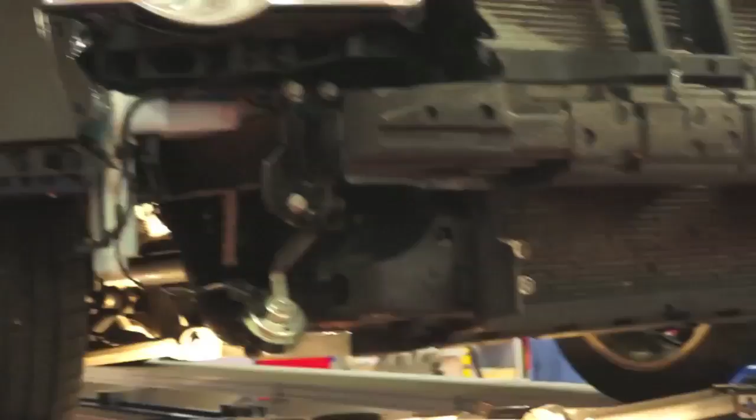Sean Hart with Car-O-Liner Company, Director of Technical Services. We're here at AASP, the Northeast Show, and we're going to be here this morning with Larry Montanez talking about triage and estimating damage on collision vehicles.

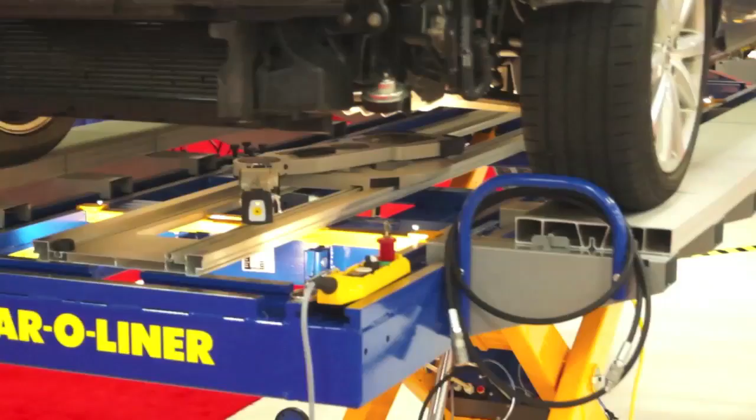Triage is a French word, a noun. It basically comes down to sorting out or separating the type of damages that are there. You also want to assign the order of urgency, the degree of urgency of how bad the car has to be repaired.

Some of you might hear catchphrases now like fast track or structural repair. If it's a fast track car, I know I can get it out in 2 days - I'm just changing a bumper cover, a headlight, maybe a fender, and painting it. I have an idea beforehand, and decide how you're going to treat the vehicle.

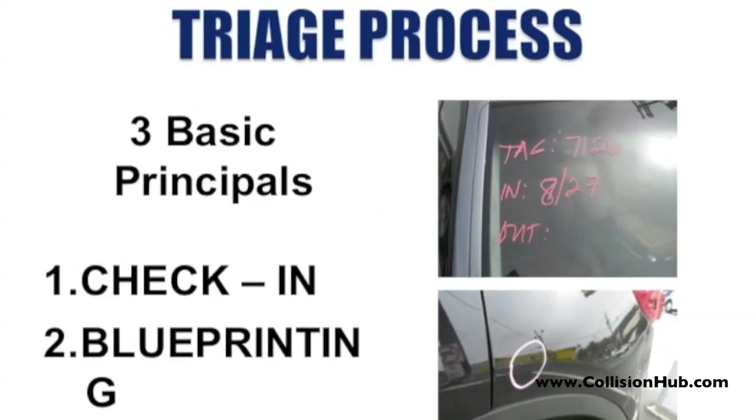The triage process breaks out into 3 basic categories. One is your check-in process when the vehicle first comes in. Your next is the blueprinting you're going to do with the vehicle. And then, of course, mapping of the vehicle.

Your check-in process - a lot of you guys do this in your shop already - you get the information from the consumer, you get their description of the accident, you tag the keys, you wash the vehicle for repairs, you get it ready to put into service. You also walk around the car with the customer, try and upsell, and then you put either windshield notes or a sticker.

You really shouldn't write on windshields anymore. They find that a lot of the chips that happen to the windshields, that colored pen gets stuck in there. And on side glass, sometimes it doesn't like to come off, and it washes off if you wash the car. Best thing is to get the sticker - most of your paint companies have some sort of sticker you guys can use for that.

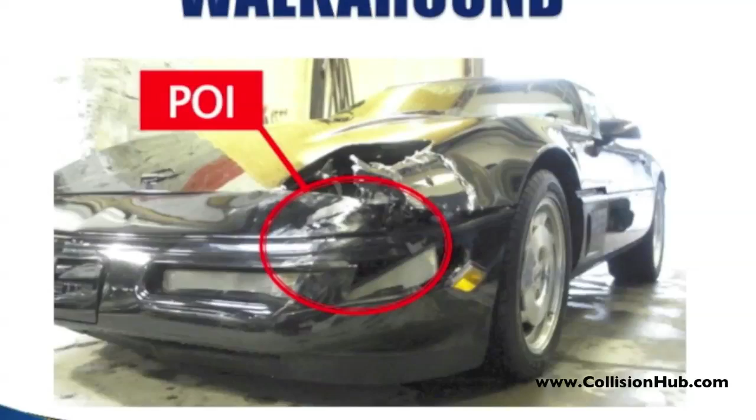So the walk around - this is a Corvette that was hit where? Left front, like a left front hit here. My damage analysis of this vehicle is going to start at the right rear. Why is that? Well, I want to find out where all that energy got deflected to and start in the least area of possible damage, then work my way back into the area of damage. I know it's badly damaged in the left front area, so where is most of my estimate going to be? The left front.

We all get busy throughout the day, we're going to miss things. So if I start in the opposite area and work my way back, I'm less likely to miss the small things.

Another thing you want to check is panel gaps as you walk around the vehicle. In this case, it's a 2-door vehicle, so you want to be able to catch and see how the doors open and close, how the windows close to the roof structure. Another thing I did here is put my fingers between the wheel and the rocker panel to see how much room is in there.

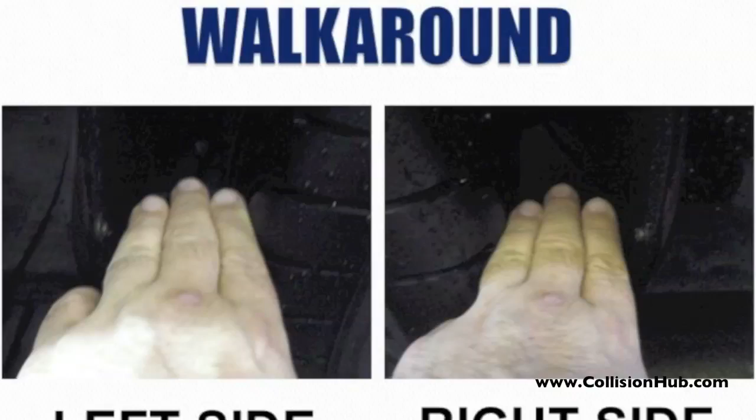Now this is a quick check - you're not fixing the car, you're not doing measurements. But if I found that only 3 fingers fit on one side and 2 fingers fit on the other, what would you think? I got something wrong here - do I need to do something else? Yeah, I'm verifying that the car has more damage visually and by tape measures than if it didn't. So I'm kind of trying to qualify or quantify why I'm going to put it on a 2-post lift and measure the car electronically. And then obviously my front area, I'm going to take care of my damages.

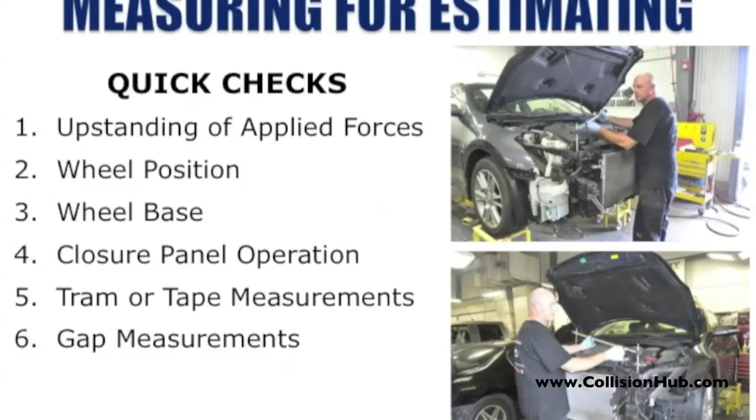Next, quick checks - obviously a tram gauge is one of the issues you want to take a look at. So when you check in with a tram gauge, you have to understand the applied forces that were impacted on the vehicle - how the vehicle was hit and where the energy went. If I hit this car dead center, where's the energy going? Pretty much longitudinally along the center line of the vehicle.

But if I go ahead and take it from where Kevin is - Kevin, raise your hand - from where Kevin is, and I hit the car right where Kevin is, inward towards the center line and at or near a 45-degree angle, where's that collision energy going now?

Wheel position. Check the wheel position on the vehicle. You can't have wheelbase shorter on one side than another because you'll get a car that does what? Makes turns all day. Wheelbase, closure panel operation, check everything on that, tape with tram gauge measurements.

This, once again, as an estimator, will take you 5 to 10 minutes to go around the car, open and close doors, check wheel position. You want to verify, is it a fast repair, or do I see something that jumps out at me and says, hey, wait a second, I better measure this car and see how badly damaged it is?

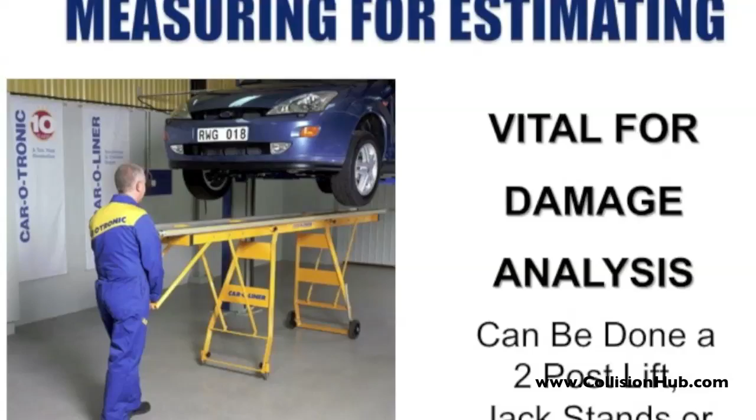Measuring for estimating, I've been saying this for years, is vital. You have to do it to be able to write a damage analysis report, or what you guys call estimating. This can be done on a 2-post lift, on certain frame machines. You can do it on the floor if you have enough room between the vehicles.

You got an F-250, you can put this equipment on the floor and measure it. This vehicle is actually basically on a flat surface right now, and it's not on the frame machine. I know the frame is sitting on top of it, but this Quick 42 is set up so that the center of it's lower than the sides, and basically the car's just driven up here.

You've probably read a few articles in a couple of the magazines where shops are utilizing this machine to measure the car. If it needs a pull, they pull it right now, order the parts, put it outside, and wait for the parts to come in and put the parts on. The car's already pulled. Or if it just needs a quick pull and some repair, they do it, they get it out, and it's a shorter cycle time on that car.

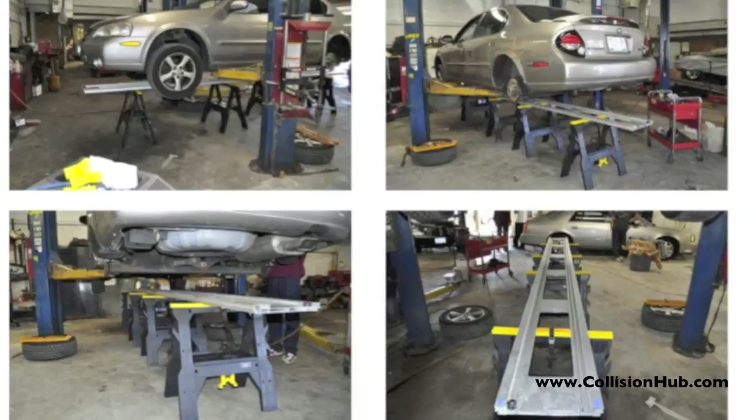Here is a shop up in the Bronx that I was doing with, I think it was Tim, and we set this shop up. There's a 2-post lift, there's a Nissan Maxima on here, and you can see the ladder, which is underneath here, we'll show that in a few minutes, is on top of what? Plastic horses. I think the whole thing was $70 for the plastic horses at Home Depot.

And it's just strapped on there, and we put the ladder on top of that, tied it down, and we were able to measure the entire bottom of the vehicle fairly easily to find out what was and wasn't damaged on the vehicle. We found there was suspension damage and not structural damage, which helped us out.

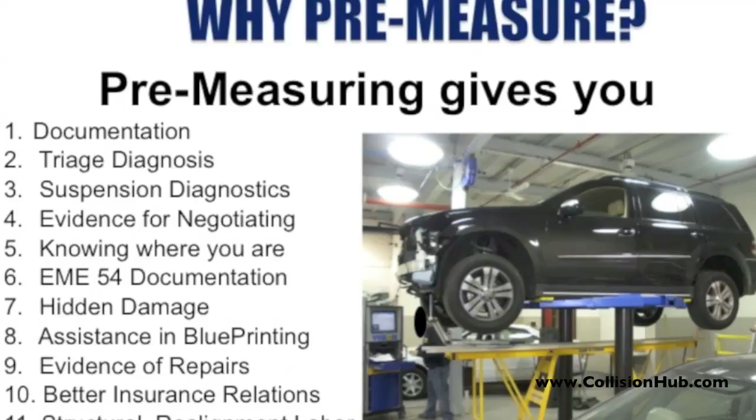So why pre-measure? Pre-measuring the vehicle gives you the ability to have documentation of what's damaged. How many guys have ever negotiated with an insurance company that says there's 6 hours of repair or 5 hours of damage on there? Can you prove that? It's your opinion, right? You're basing it on, well, this is what I could do it for and make enough money, all right? But wouldn't it be better to know what's there?

How many guys have ever underestimated frame damage? Just give me a quick pull, I'll take 2 hours for it. Yeah, 2 hours set up, 2 hours pull it, no big deal. And then you find out when your tech starts working on it, the material doesn't want to move, or you find there's more damage than you thought beforehand. So let's know beforehand, before we even start.

Triage diagnosis. We'll know now, does a car go in the frame machine? Can it go into fast track? Do I need suspension repairs before I even do structural repairs? What's wrong with the vehicle, we need to know.

Suspension diagnosis. This particular equipment, this Car-o-liner Evo, will allow you to actually measure suspension components and do a comparison. You can't do a wheel alignment with it, but you can measure upper and lower control arms to find out if there's a variance between the left side and the right side of the vehicle.

Evidence for negotiating. Some states allow you to negotiate the claim with the insurance company. Instead of bickering back and forth - I need 3, I need 2, well I'll give you 4, I can't pay you this amount - instead of arguing that way, it's like, here's the amount of damage, this is how much time I've calculated I needed. This program at the end actually shows you the amount of millimeters it's off, and you can type in what you feel the time is by breaking it out differently, which prints out on the screen with the measurements. It looks nicer. Once again, it's not calculating it, you're doing it.

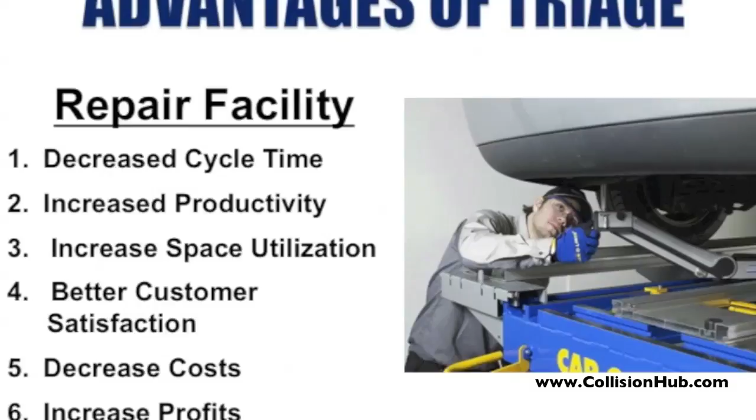Increase productivity. Now I'll put the car in the machine, it'll stay up there for a day or two, it comes off the machine and goes into production. How many shops are still operating with: put the car in the frame machine, start repairing it, find other damages, leave it alone, go to something else, and then come back to it? Well, now you're tying up a pretty expensive piece of equipment for a few days.

Increase space utilization. Well, now I won't have cars tying up my frame machine and other vehicles tying up the shop, because the car's going on the machine, staying a specified amount of time, and then coming off again.

Better customer satisfaction. Anyone had to lie to a customer ever in their life?

Parts are on back order. Really? I called up the dealer, and the dealer says that part's not on back order. All right, we've all been caught with that one at least once.

So, decrease cost. Remember, you got paid to do the car one time. Nothing worse than getting it off the frame machine, sending it to the wheel alignment, and the alignment shop says we can't do anything with it, and bringing it back and putting it back on the machine and trying to tug things around incorrectly to make it work. You didn't get paid for that second time around. And of course, increase profits, because we're not wasting money anymore.

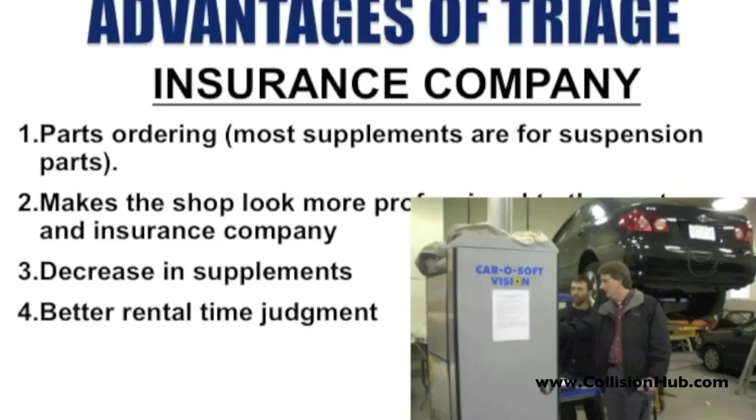Advantages of triage to the insurance company: parts ordering will be decreased, and supplements will be decreased because of suspension components. Number one reason for most supplements are suspension components—we don't know what's wrong. It also makes the shop look more professional to the customer and the insurance company. The car's not laying in your shop for weeks at a time now.

Decrease in supplements. Now, granted, you might have more supplements because you didn't come to an agreed price, but no more supplements where they already know how much money you want to charge. They just didn't want to pay for it on the first one.

You're not going to get to the point now where they're writing for 35 and you go, great, it's fantastic. You put it on the machine, you take the engine out, you find out the engine's cracked, the firewall's damaged, something's damaged someplace else. You're like, oh wait a second, this is a problem now.

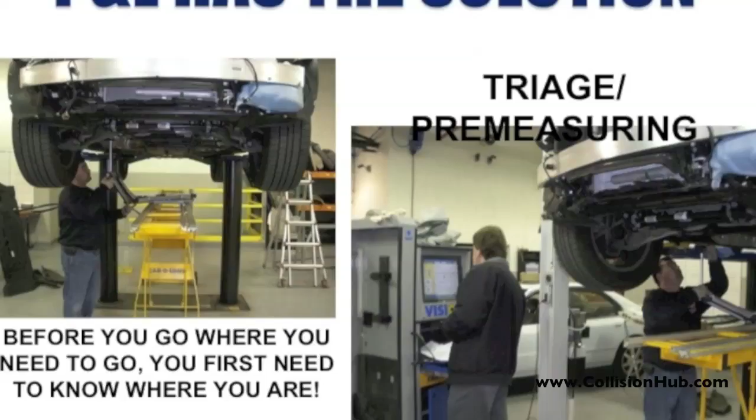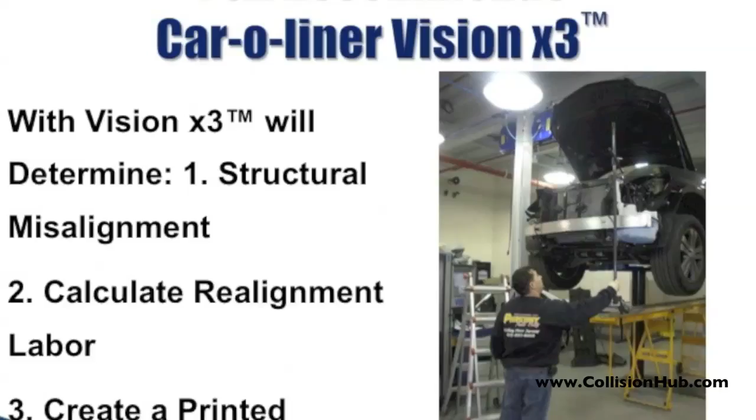Better judgment time—we have the solution for you. Before you go where you need to go, you first have to know where the vehicle is at. So triage pre-measuring can be done on a 2-post lift. We utilize Car-o-liner Vision X3, which will help you with structural misalignment, calculate realignment time, create a printed document to prove what's wrong with the vehicle and where it's at, and then create a repair plan for your technician.

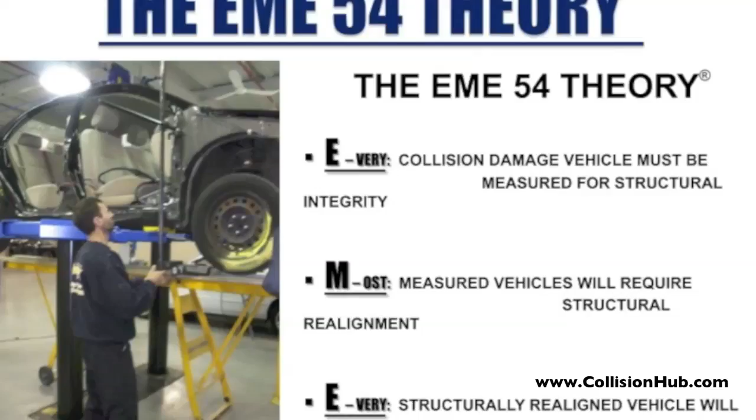How many guys have ever read my article about the EME 54 theory? It basically states that when you go to repair a damaged vehicle, you have to take a look at it structurally. The first E of EME stands for every collision damaged vehicle must be measured. I don't think there's an argument there—we should check it out.

Tape measure, tram gauge, measure the car. The M in EME is most—most collision damaged vehicles will require some sort of structural realignment. Because if we check everything out visually and it fails, and we have to measure the car, most likely it's going to need some sort of pull, most of the time. And every collision damaged vehicle that's been on a frame machine or structural realignment apparatus has to have this at the bare minimum when it comes off.

What's the one thing they all have to have? Has nothing to do with body work. Close, very close. I can't say it needs a wheel alignment, but it needs a 4-wheel alignment check. Maybe the guy puts it on the Hunter machine or whatever alignment equipment he's using and doesn't turn a nut, bolt, or screw because it's back in position. Highly unlikely, but I can't say it has to have an alignment itself—it can have a wheel alignment check.

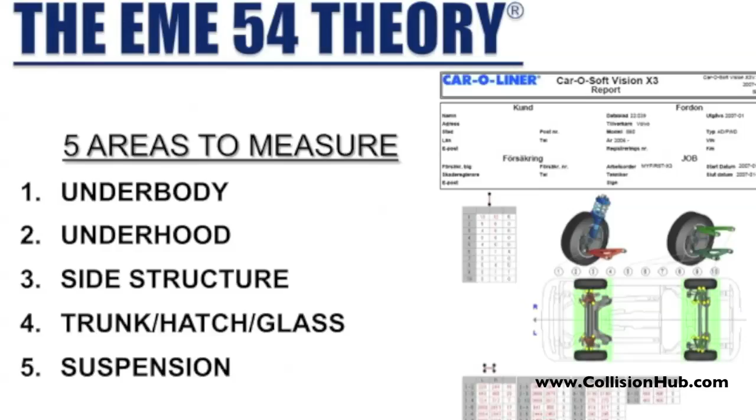Now, the 5 areas of measuring are the underbody of the vehicle, the underhood area, the side structure, the trunk hatch or glass opening areas, and then of course the suspension components. Now you might only have to do 2 or 3 of these—you may not have to do all of them. We're going to show you that in a second here on this vehicle.

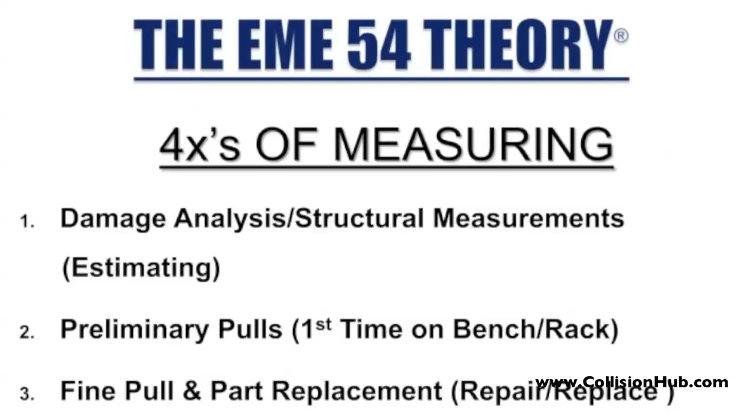The 4 times in measuring: well, the first time I measure a car is when I'm setting up my vehicle to write my damage analysis report—I hate the word estimate, but to write my damage analysis report. The first time I get it on the frame machine, a real frame machine, not just driven up on top of it, when I actually clamp it down, is because I'm changing my datum. My width and my length will stay the same—my height's going to change. So we have to go ahead and remeasure it.

During my pulling and replacement of components, I'm going to measure the vehicle. And then, of course, my last time is when I'm finally done with the vehicle.

So for you guys out there, when you go to measure a car to help your technicians out in your shop and avoid problems, because a lot of guys I see when I read their damage analysis or measuring reports, the techs seem to get a little lazy. We all know we have to measure the center section, right? For any piece of frame equipment out there electronically, you've got to measure the center section.

Then, let's say the car's hit the front, a lot of times the guy just measures the front and forgets about the back. Then you send it through a wheel alignment, and what happens? We wind up with something bent in the back because the center of the car stayed strong and the back of the car moved, like we saw in the videos.

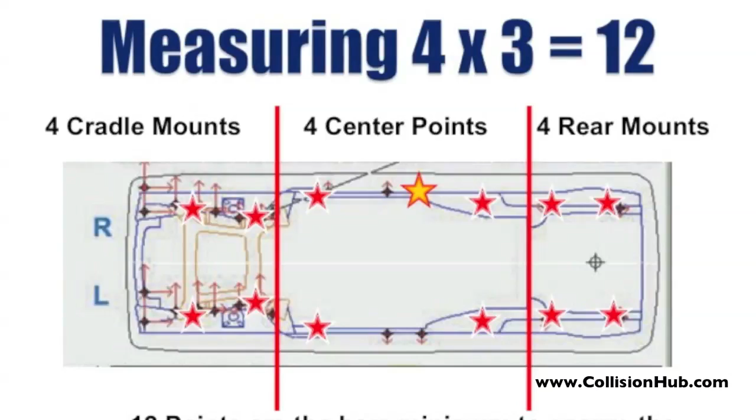So basically what we're saying at P&L is that bare minimum, you have to measure 12 spots under the car. Not 8, not 6. Lacking anything else, measure the 4 suspension cradle points, measure the 4 in the back for the suspension, and obviously you have to have the 4 in the middle to get your center line. That's it, bare minimum.

And if you find something wacky, guess what? Then you got to do more measuring. But at least this will give you a better picture than just measuring 2 or 3 spots.

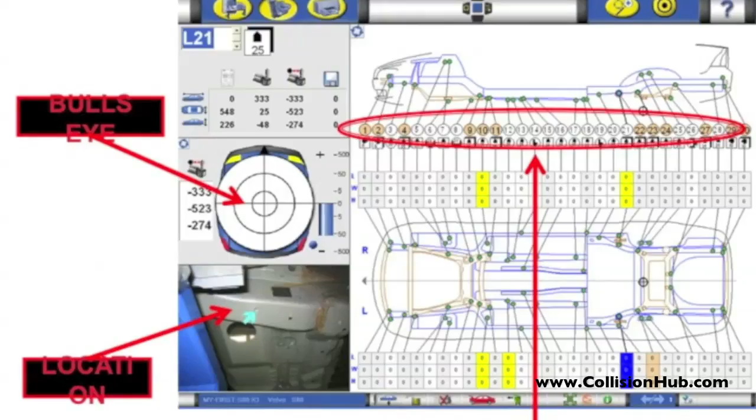With this system, we're going to see, I'm going to switch the camera so you can see theirs. It's going to give you a bullseye where you can pull to. It'll give you a location underneath the vehicle. So don't watch Nick directly, watch the screen up here. It'll show you where he is underneath the car, striking his points.

And then you have about 20 to 30 measuring spots on this vehicle. Do you need all of them? No, you'll need a good percentage of them, based on how much damage the vehicle actually sustained in a collision. And what's nice is we did a damage analysis on the suspension of this car, and we'll let you know if we found something wrong or nothing wrong. This will allow you to measure suspension components.

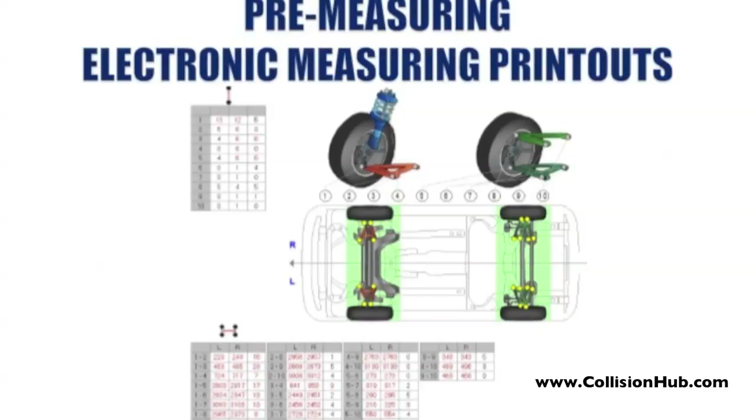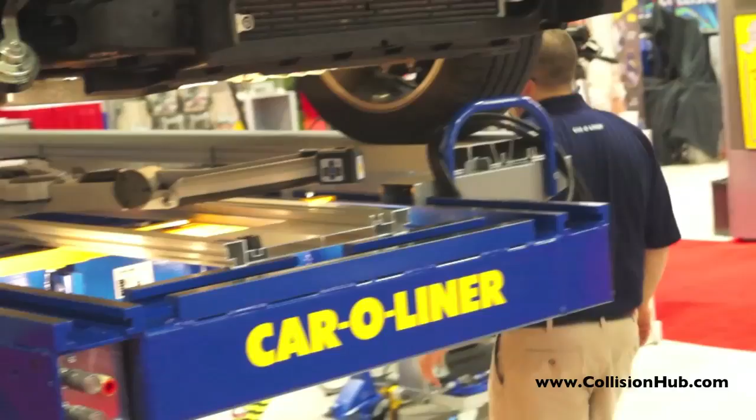And I'm going to introduce Nick, or who's doing it? Nick or Todd? Okay, I'm going to introduce you guys to Nick from Car-O-Liner. What's that there? What's that with that? This vehicle here is a, what is it, 11? I think it's an 09 Passat. 09? This is an 09 Passat.

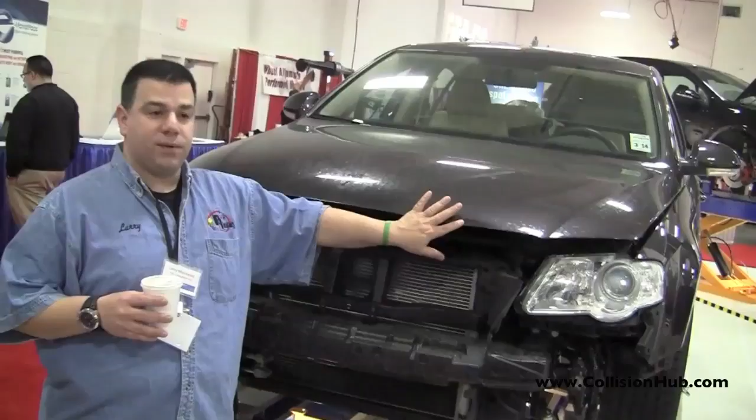I don't want you guys to walk around it now, I'm going to describe it, you can look at it afterwards. The car has a very light hit to the hood. Also, when we opened up the hood and removed the grille, we found that the plastic rad support is damaged, it's cracked, it needs a new one.

The bumper absorber has some deformities to it. I didn't pull off this absorber to see if the reinforcement's damaged, but there's a little bit of marking to the reinforcement back here. That's basically all the damage.

I believe all the doors opened and closed properly, right, Nick? All the doors opened and closed properly, and the wheels look to be in proper position by quick checks with just our eyes and some quick measurements.

So basically, where's our damage on this car? I would say probably from here forward. You guys can look at this afterwards, but from here forward.

So is this car a candidate to have measurements done to it? Or is this just going to be replace the rad support, replace the hood? Fast track. Fast track. Okay, I got a guy who says fast track. Anybody else? What do you think?

Do you think we have an issue with this vehicle? We have only damage to the hood, a cracked rad support, a cracked foam absorber, and a little mark to the reinforcement that may or may not require replacement. Seems like a fast track car, right? Change the hood, change the rad support, paint the nose, and that's it.

Do we need to measure this car? All the doors are in the right spot, we open and closed them, the gaps look good, and the wheel positions, by a couple of quick checks, look good. So what do you think?

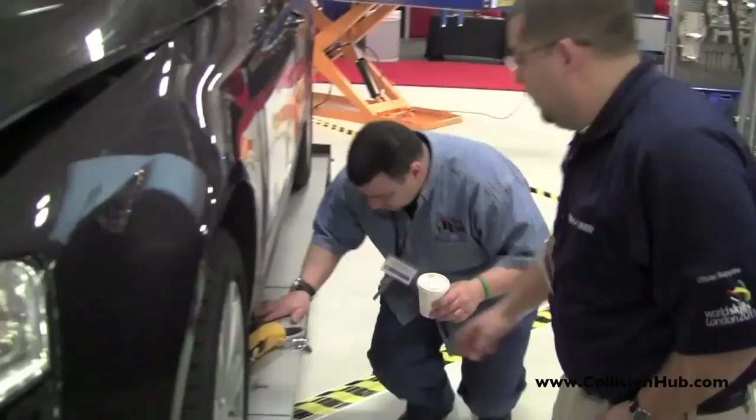We have to orientate the arm. You got it, Todd? Okay. When this comes up, you have to orientate the arm so it recognizes.

It's all Bluetooth, there's no wires. So you got to orientate the arm for those who aren't familiar with it. You want to see a full demo on it, see it after class. I'm not going to explain the whole process.

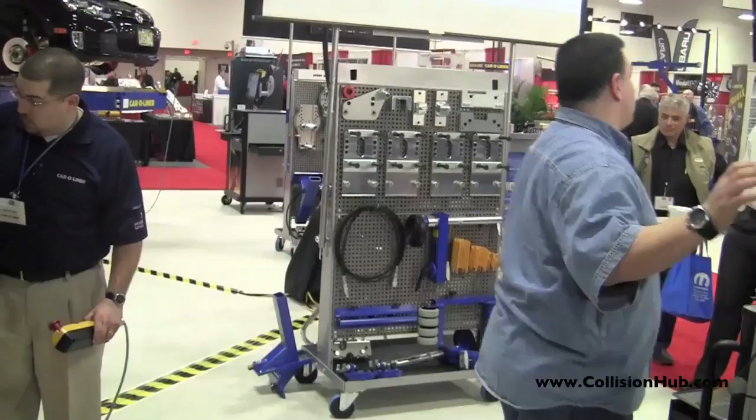So once the arm wakes up, it's going to give you this screen. And this screen here basically is showing you what I told you about, your 30 measuring points. You have to strike your center line.

So what Nick's going to do, with Todd's help, is they're going to strike a center line in this vehicle. There's a process to follow. We're starting at this point back over here, which is giving us a little picture of it. So they're going to go ahead and do this now.

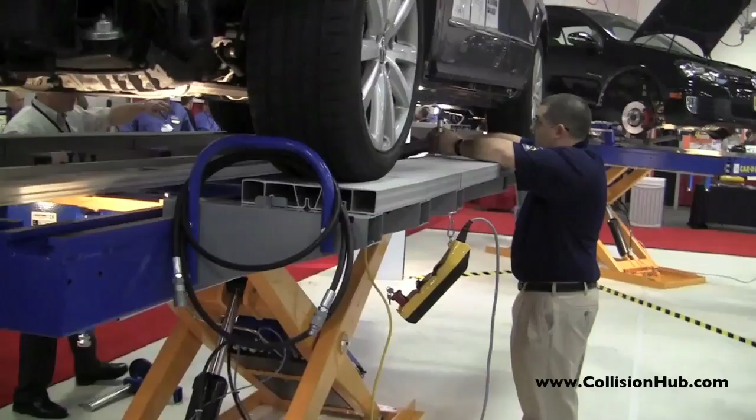Generally in a shop, this takes about, by the time you get it up on top of the machine and get it ready to measure, you can get this done fairly rapidly, within an hour, let's say. You can get really good at it. You can get it down to a shorter period of time.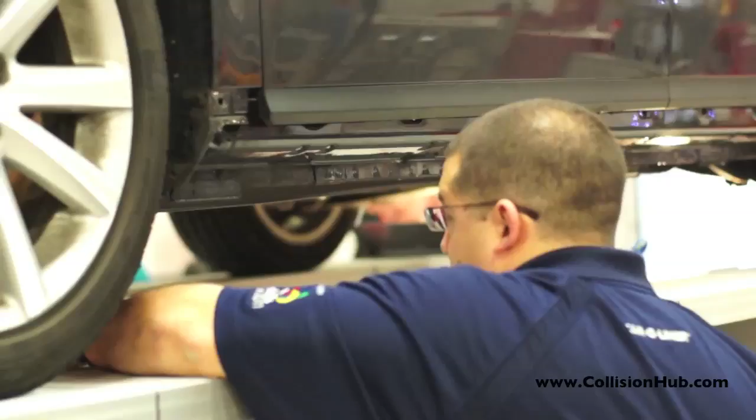The noise you're hearing is the machine saying you found the right spot, I checked the measurement. The last measurement they're going to take, listen, you're going to hear a difference in sound.

Gives you a cheer. Now when you're under the machine or over here, you don't have to look at the screen. The mouse is on the arm.

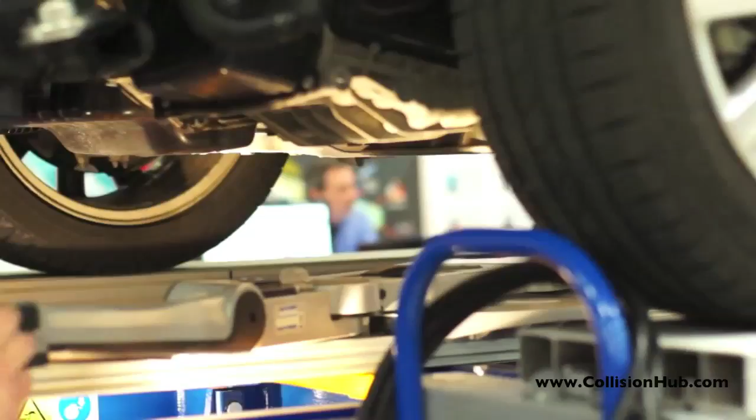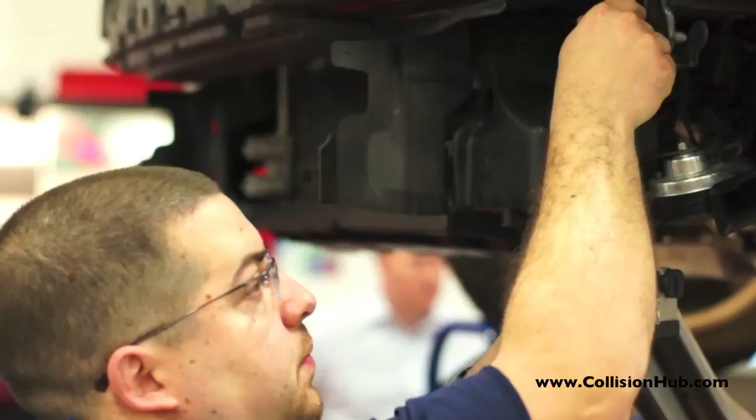Another nice feature, which we're not going to show you now, but they have it on the iPhone application. So your tech can hold an iPhone under the car and actually see the screen. Another one of the guys, Tim, actually did a pcAnywhere with an iPad and was actually able to see the screen and control it from a separate pad if you wanted to. There's other options for that for the triage area.

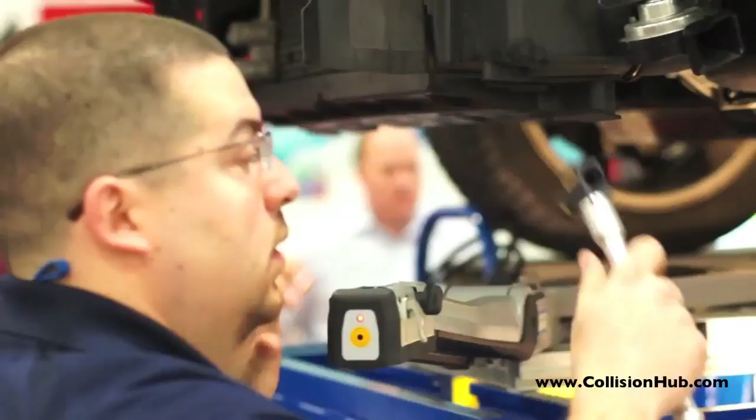So Nick's going to grab some pictures of this area right now, and he's grabbing some measurements underneath. And as he moves around, you can see it'll show you where you are over here. And on this area, it's showing you the actual picture of what you're actually measuring.

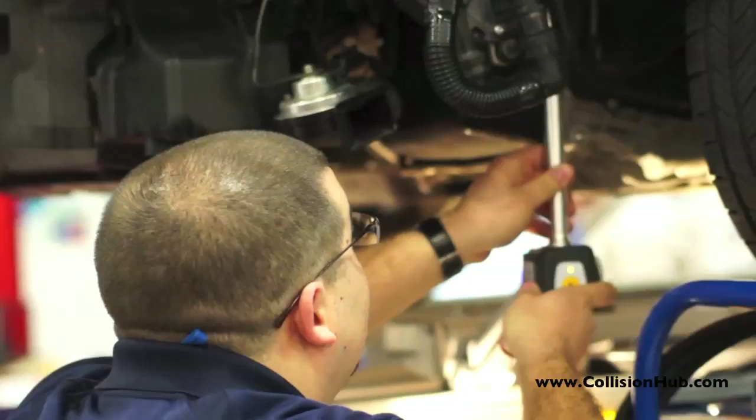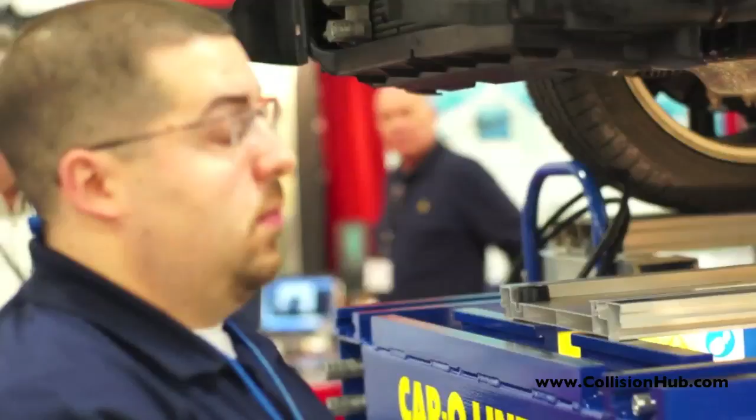So Nick wants to grab a couple of measurements. Now, the machine is set up for plus or minus 3 millimeters on the structure of the car. When a measurement comes up good, or within parameters, it's black, and it's a positive number. But notice that we have a bunch of red areas on this car, a bunch of negatives.

What do we got going on here? Remember, it's length, width, and height. So it's telling me right now, at those two areas for width, I'm -5, so it's in towards the center line. On the other side, it's telling me it's +4 and +5 from the center line going outward.

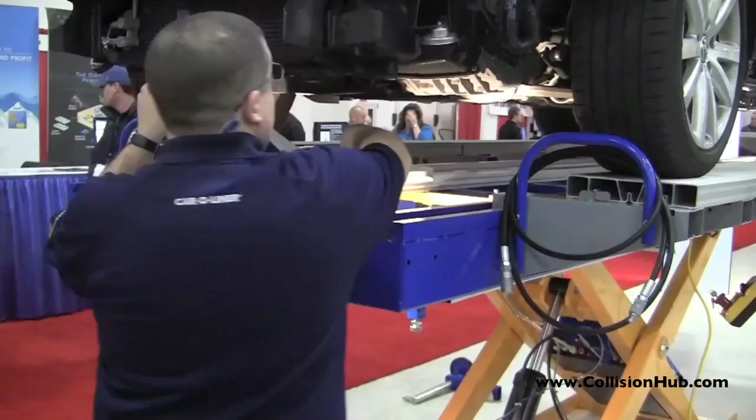So what happened to this car? We have technically a little sway going on. Although the car looks like nothing's wrong with it. Once class is done, I'll still be here, we can go over the car more in depth. I just don't want to take everyone's time because it's supposed to be a short awareness type of thing. But you'll see the hood lines are not off.

It looks okay. Remember, a millimeter is the thickness of 1 dime primarily. Primarily my damage is in the front. Does this car have to go on a structural realignment apparatus? Yes or no? Did I prove it to you? Would 99% of the time, would any shop put this car on a machine without measuring it?

No, you wouldn't know. And I'll bet you money it may take a wheel alignment. But what's going to happen 6 months down the road, 8 months down the road? You're going to have improper wearing of the tires. It's going to start causing drivability issues because the car's not right, it's off. You might even get slight dog tracking on the car because they're going to offset the wheel alignment.

I'm going to turn it back over to Nick right now. What do we got? We have a slight sway here, and I didn't go ahead and measure every point, I'm just trying to grab a couple quick ones, went right to where the damage is, and that's enough to say okay, we want to look at this a little further.

And like Larry was talking about, if this was a printout that I'm going to hand over to the office, I'd get a couple more points in the middle of the car, a couple points in the rear of the car, and you'll show in this scenario that there is no damage to those points.

Well, I have another thing I want to show you guys before we go to suspension and before I finish up my last 2 screens in the PowerPoint. What happens if I have an insurance adjuster in the shop or an estimator as a technician that I have to show something? Bring up the bar graph. I want to show him visually what's damaged on the car.

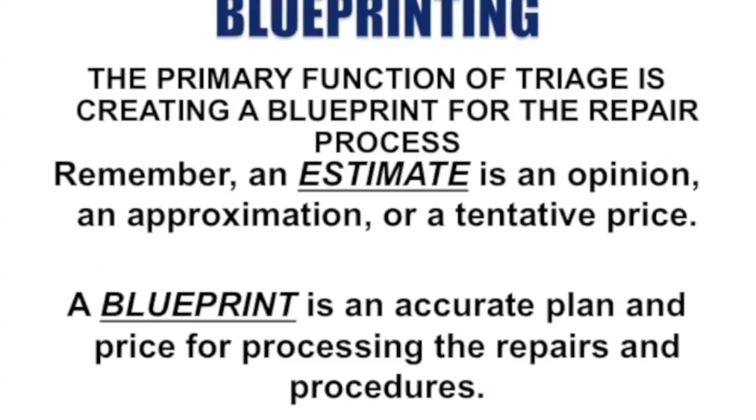We'll be done. All right, blueprinting. After we're done measuring our car, we're going to want to blueprint the vehicle. Blueprinting, the reason we're going to do this, is that an estimate is only an approximated price. It's a tentative price, not an accurate description of what's wrong with the car. Along with disassembly and the measuring, I can make an accurate repair plan for what needs to be done. So the blueprinting must determine all necessary labor tasks have been identified.

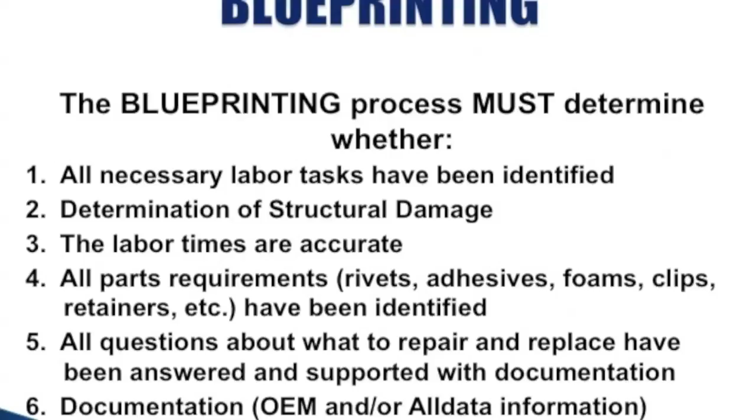Determination of structural damage, we determine the structural damage to the vehicle. You also want to ensure that the labor times are accurate in your repair report. You also want to determine all parts are listed. So you're going to check with what? Alldata, the OEM, something like that, to make sure you're ordering all your additional nuts, bolts, screws, clips, retainers, rivets, adhesives. Also, all questions have been answered.

Looking at this vehicle now, if I gave you my estimate, would you be able to answer all the questions on my estimate if someone asked you about it? Why? Because I visually gave you a picture of what's wrong with the car, so now you're better able to explain what's wrong with the vehicle. And of course, you have your documentation. Mapping of the vehicle. If you walk up to this Audi A8, do you know what needs to be done to it?

All of your technicians, at one time or another, could you walk up to this car and know what's getting done to it? Why? Because I mapped it. So I don't have the technician standing in the office with his hands in his pockets waiting for me to get off the phone. He could be out in the shop working, because the car's written up. He knows what's wrong with it, he knows what he has to do. And the next car looks the same way, so I can walk around the shop and say what needs to be done to the vehicle. No brainers.

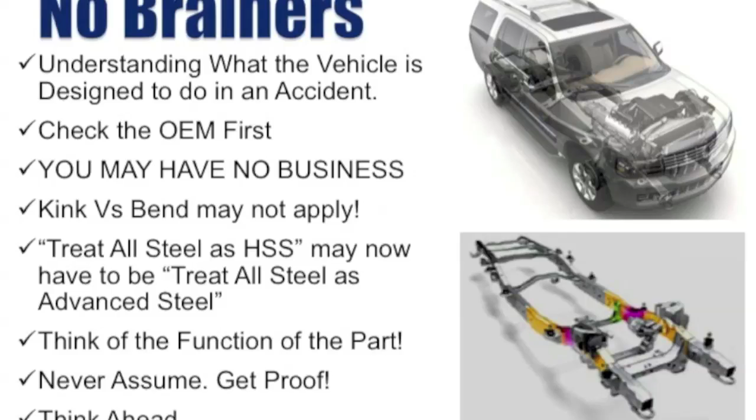As we finish up, understand what the vehicle was designed to do in a collision event and how it's going to react. That's very important. Also, check with the OEM first.

Remember, the OEM sets the standard. You cannot make standards up. The guy who made the vehicle makes the standard. I do not believe in making repair standards - it's one of the most ridiculous things I've ever heard of in my life, unless none exist and the manufacturer doesn't have one and someone needs to do something the manufacturer won't. But how many guys know of manufacturers without repair standards or procedures for their cars? I really only know of two, Hyundai and Kia. The rest all have procedures for it.

You may have no business fixing that car. Anyone ever get involved in a car you should have never touched to begin with? Anybody want an Audi A8 in their shop? You want to play around with that car, all aluminum? How about I'll give you one better - how about an S-Class Mercedes-Benz?

Those who were in my class last night learned that the quarter panel goes on in a very strange way. Or a BMW - another quarter panel that goes on in a very different manner. So once again, know what you can do. Learn your limitations. Learn when you've run out of talent before the talent gets you, and you don't want to have that happen to you.

It can get expensive. Kink versus bend rule may not apply. Remember years ago, if it's kinked less than 90 degrees you have to replace it, if it's bent it's probably repairable. That doesn't hold true anymore. Even I-CAR said that back in 2007, kink versus bend may not apply due to the type of steel substrate or the type of material being used. If you don't know what's wrong with the material or what type it is, treat all high-strength steel as advanced steel until you can prove it.